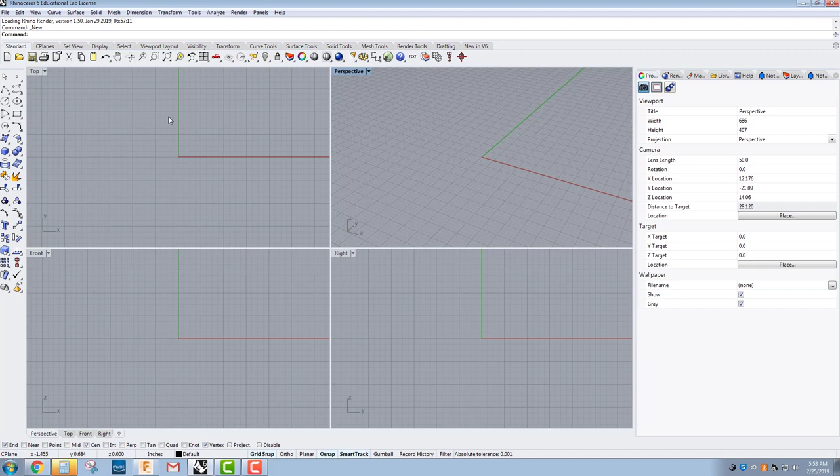But here we go. We're going to start off with a new Rhinoceros file, and for our template, we're going to do small objects inches. Click open, and we're going to be working in the top viewport. I'm going to double click on that, maximize it. Let's check out our layers - we're going to be drawing on the black default layer. That's fine. We're going to start off very similar to what we did in the Fusion video with a circle at the center.

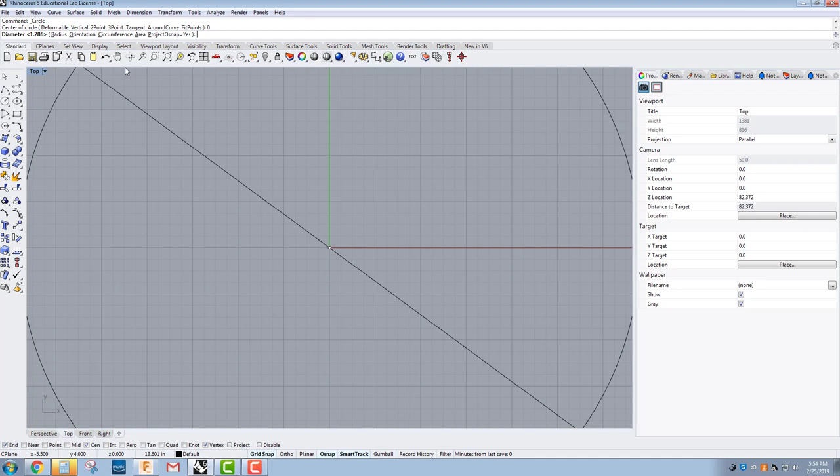So we're going to go circle, center radius. Make sure the center is at 0. Enter. Now we're locked in at the origin, and first time Rhino users, most likely it's going to default to a radius, so you need to change it to a diameter. We're going to do a diameter of 0.785. Enter. Right click to repeat that previous command. 0, enter. This is going to be 1.250.

Enter. We need to draw a line straight up. We're going to go 1.37, enter, enter - whoop, that didn't work. Let me slow down. 1.37, enter, place it, left click, there we go. So there's our line that is...

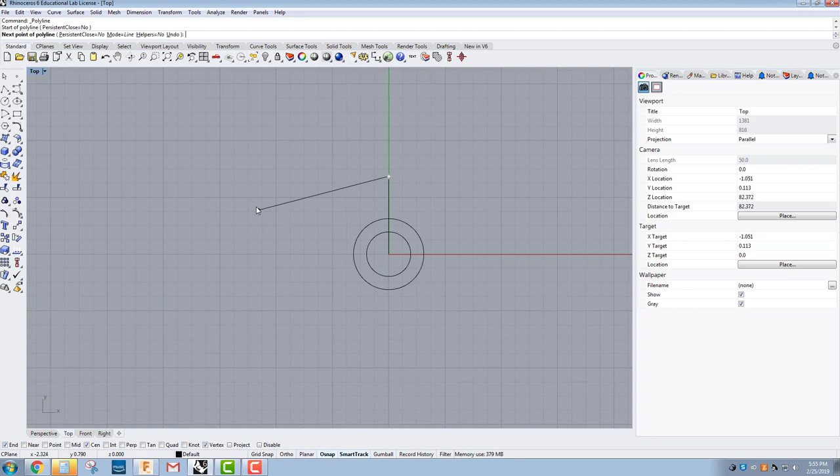1.37 inches tall. Line again, we're going to go over from that endpoint, making sure you always have your endpoint snap on down here in the bottom with your O snaps. I don't need the grid snap on right now. Going to go over 2.575, enter, and that looks good. Right click to finish. I'm going to select that, and I'm going to turn that to the white layer, kind of like a construction line.

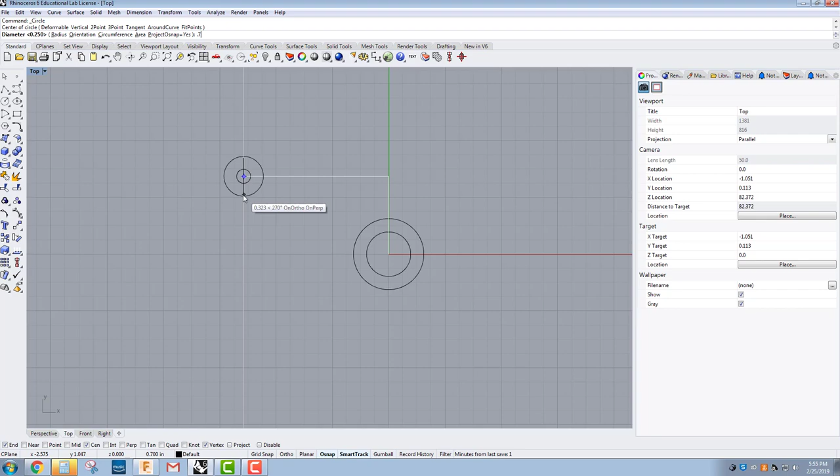Going to go to the circle tool, and that's going to be at the endpoint. That's going to be 0.25 diameter. Right click to repeat, center again. That's going to be 0.750. Once again, getting all these measurements from the drawing sheet.

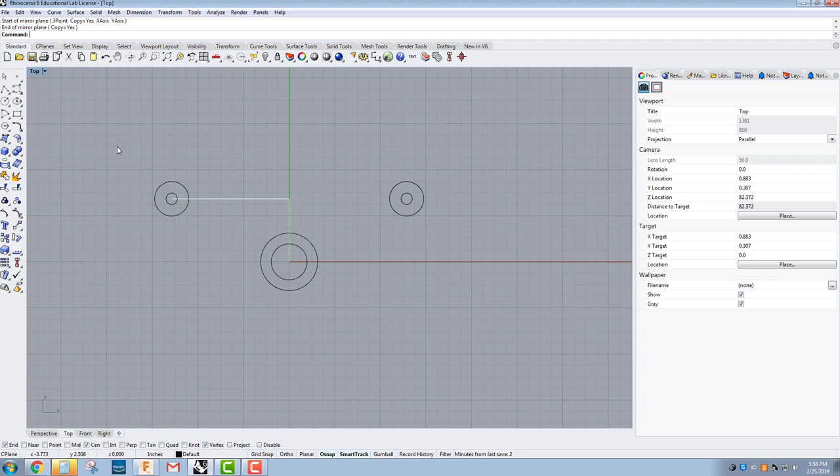Okay, looking good. Now we're going to either repeat that same step or do a little bit of mirroring. So we're going to go over here, click and hold, and the mirror tool's right here, or you can simply just type in mirror. Select objects to mirror is going to be our 2 circles. Enter when done. Start of our mirror plane is going to be this bottom and that top right there. And then we're going to repeat, right click to repeat the previous command, spacebar or enter also works. Select our objects, enter. Start of our mirror plane is going to be right there. There we go, keeping everything nice and horizontal.

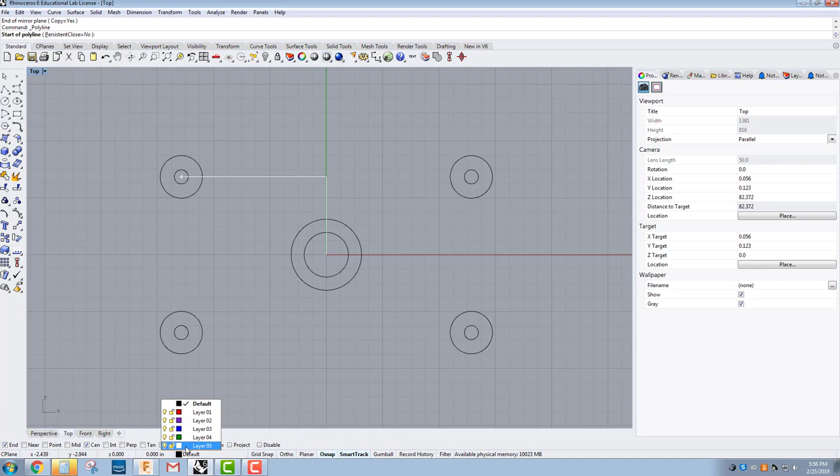And we're looking good. Line tool, time to connect the dots. This one's going to be a construction line, so I'm going to switch to that white layer and go down, center, center, to center. I don't even need these - nah, I'm going to keep them. They're not bothering me, they're fine.

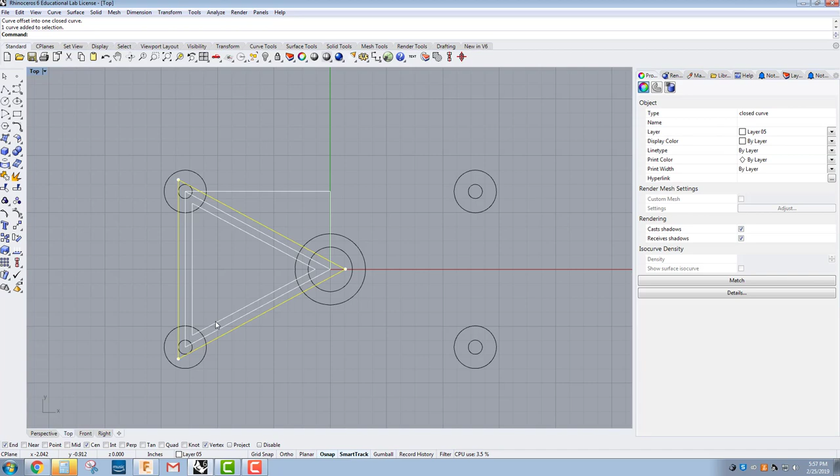We need to offset, O-F-F-S-E-T. And we want to offset 0.125. Enter. Do that on the outside. Right click to repeat. Do it on the inside, 0.125. Now these actually need to be on our black layer because they're an object line.

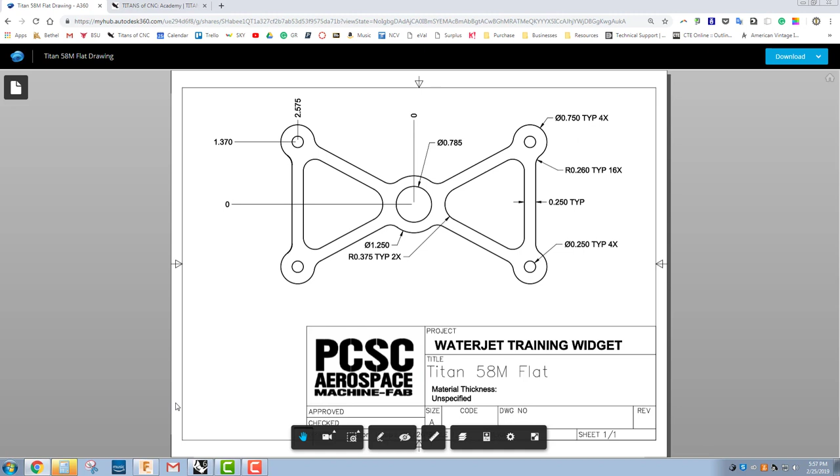Looking good. Time to fillet. We're going to do the fillet right here - fillet curves. Gonna select our radius first, and that radius is going to be 0.375. So 0.375, enter, and then it says select first curve to fillet, so that's curve 1, and then curve 2. There we go. Right click to repeat. We're going to change our radius to 0.260. Enter. Click, click. Right click to repeat. Click, click. Okay, looking good. Press escape to terminate that.

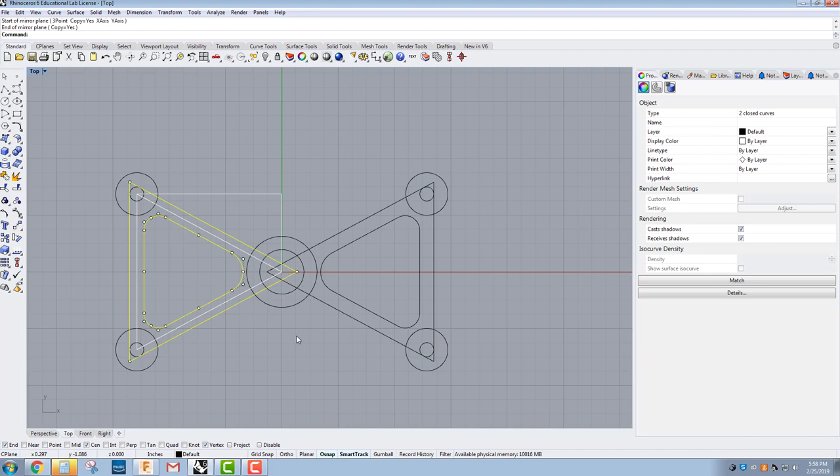I'm going to take this geometry and mirror it center straight up, holding down the shift. Everything's looking symmetric. I can now go ahead - I'm going to switch to my black layer, and turn off the light bulb right there so we don't see that white geometry anymore. We don't need it. And we need to do some more fillets because we have all these sharp corners. So I'm going to click on the fillet - it's still at our previous value of 0.26. And then we just got to click. A lot of clicking.

Okay, we got our fillet. Oh, missed this one right here. There we go. Fillet. Okay, looking good.

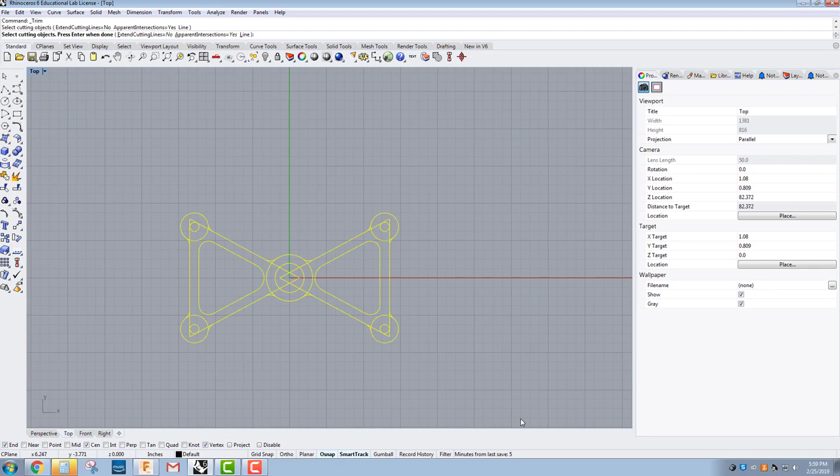Now we need to trim away a lot of this geometry that we don't need. So we're going to go to the trim tool right there, or type in trim, T-R-I-M. Select cutting objects - easiest just to select everything. Press enter, and now click on stuff that you want to magically disappear.

Once again, sound effects are always for entertainment purposes only.

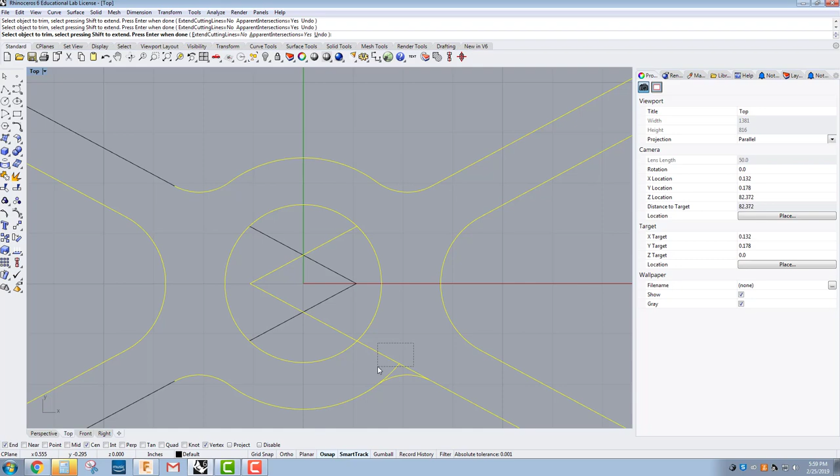You can even get fancy and hold down and drag right to left and do that crazy witchcraft. Just like that, we're getting somewhere. Boom.

Click. Okay, it looks good. Looks like a 2D shape. Now we click on everything. Notice we got a whole bunch of unjoined geometry.

So we're going to join it right there with the puzzle piece, or just type in join, and that's going to join these segments all together. Notice they're each individual. We're going to do one final thing since this is perfect and done, locked in, ready to go - we're going to group it. It's going to make all this thing as one solid entity, one group, hence the name group.

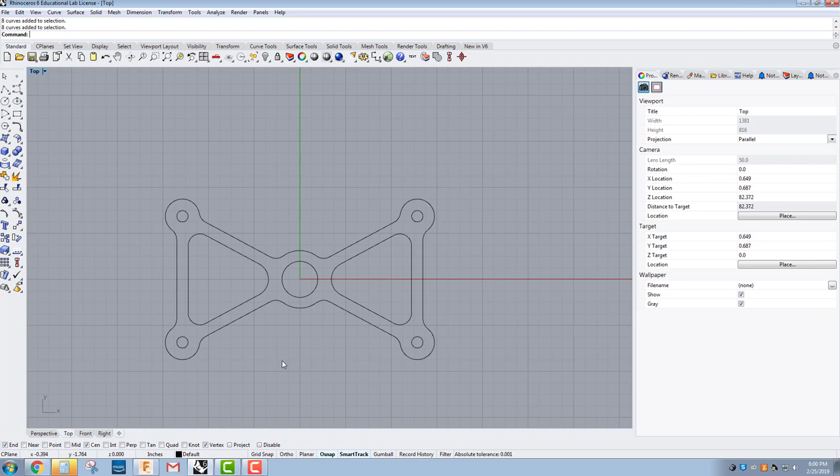Okay, so that's all you need for creating the 2D part in Rhino. If this was going to be laser cut on the Trotec laser, we would need to change this to the red layer by clicking on it and then clicking on the name of the red layer.

And this red in Rhino 6 is not the actual red for the laser cutter. We need to click on the color. You can do it over here on the layers, or you can do it down here. Click on the red - that's kind of a darkish red.

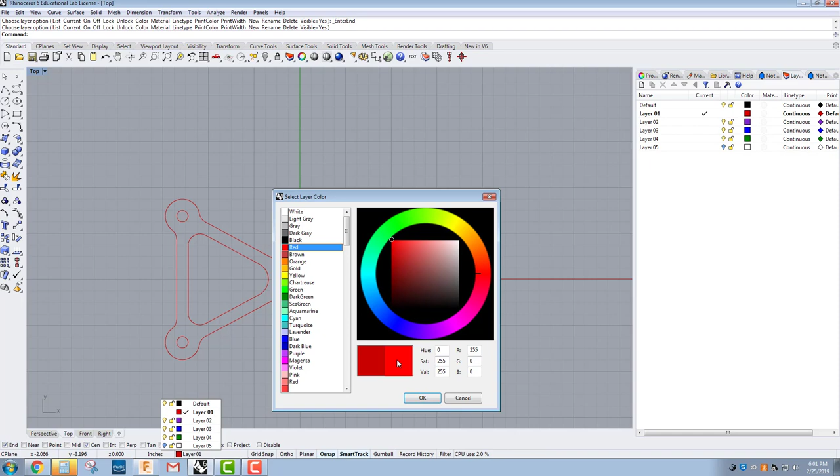We want this pure red right there, that's labeled red. Click OK. Now it's a brighter red - that's the red that the laser recognized.

But I'm going to go ahead and change that back to black. I should have saved this. I'm so embarrassed, but whatever.

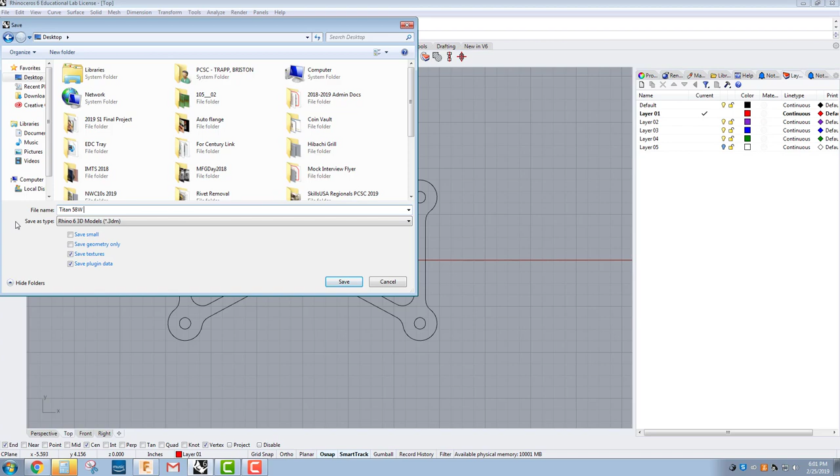It didn't crash. So this is Titan 58W for waterjet widget, and this was obviously done in Rhino 6, saving it on my desktop.

And since we're going to waterjet cut this out, we need to get this into Fusion. I do have a separate video for that, but I might as well show you how to do that. If you know how to get this into Fusion, you can just peace out.

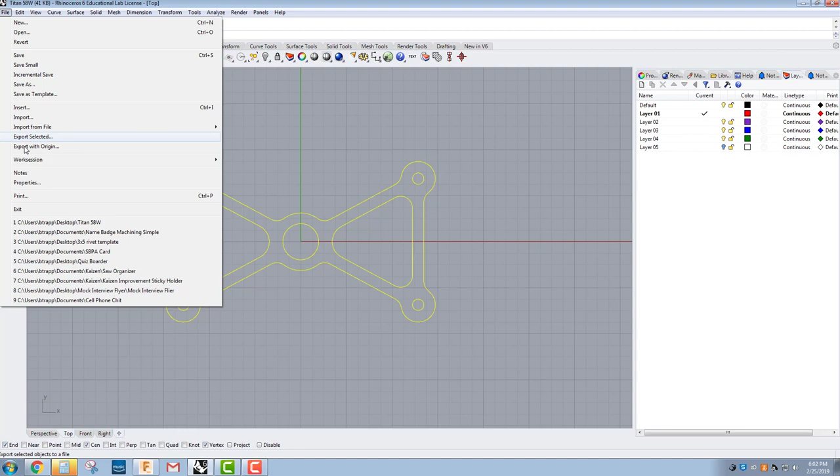See you later. So we need to do this as a DXF. So we're going to select everything. Right click on the save icon as export selected, or go under file, export selected, and we're going to save it not as a Rhino 6 file but a DXF. And once again, give it a name.

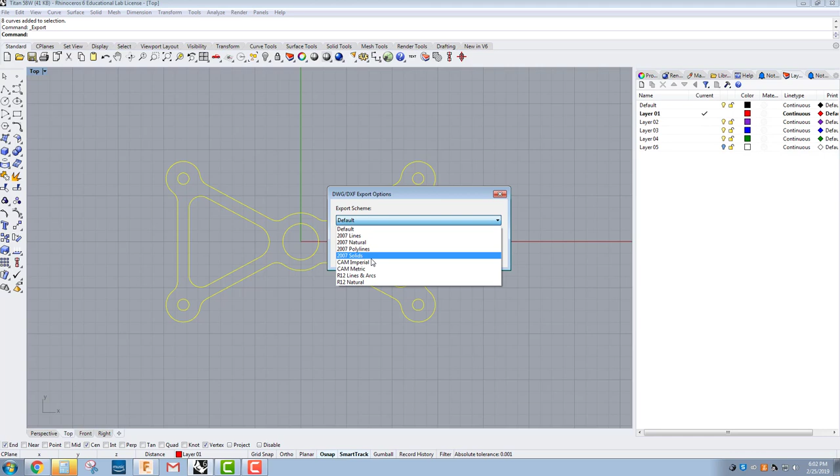I'm going to call it 58W DXF. Save. Usually you get this export scheme window, and CAM Imperial is a good one to use. Click OK, and then we go into Fusion.

Oh my goodness, I already made that in Fusion. Why would I make it in Rhino? Just for fun. Also, some of you might have more experience in Rhino.

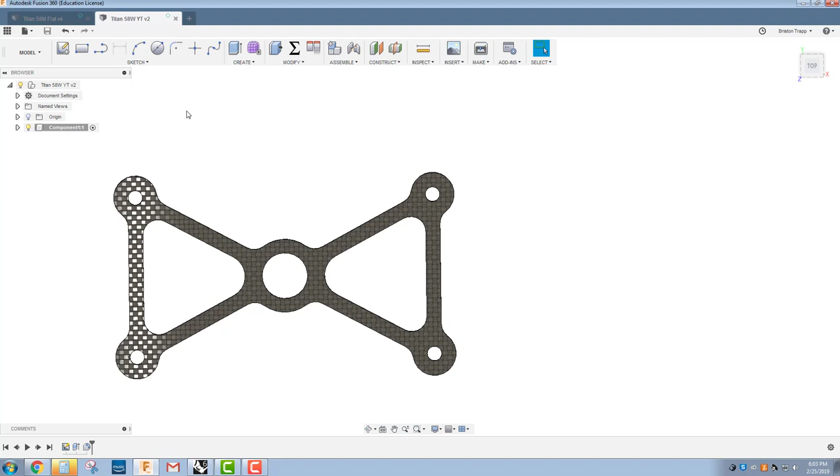Rhino has some powerful tools. Not parametric, can't really edit it, but it is something that you might want to check out every now and then on certain parts. So I'm going to go to a new file, and then we're going to go Insert DXF.

We're going to put our sketch of our DXF right here on this bottom plane, and then we need to select our DXF file. We saved it on the desktop.

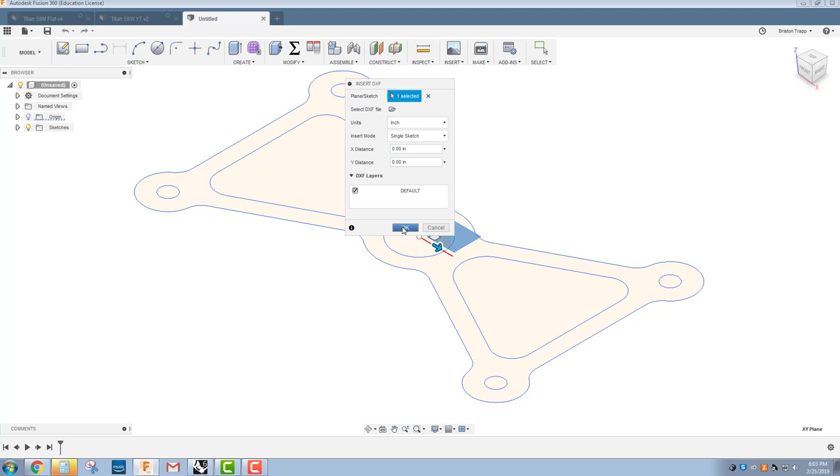So it's going to be the 58W DXF. Open. Wait for it - looking good. Click OK. And now we can extrude that out to our thickness of 0.1.

Because ultimately, if we're going to get this cut on the waterjet, we have to run through Fusion, so we're going to program it in the Fusion 360 manufacturing workspace. That's in another video coming up.

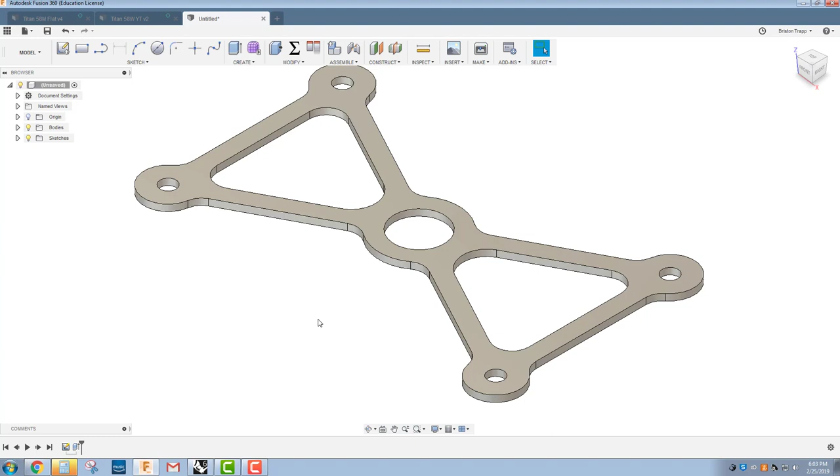But if we were just going to do a little prototyping on the laser cutter, we would ultimately have to get it into Rhino, and that's involving exporting the Fusion file as a DXF and importing it into Rhino.

So that's that for this Titan 58W for waterjet widget. Thank you and enjoy.